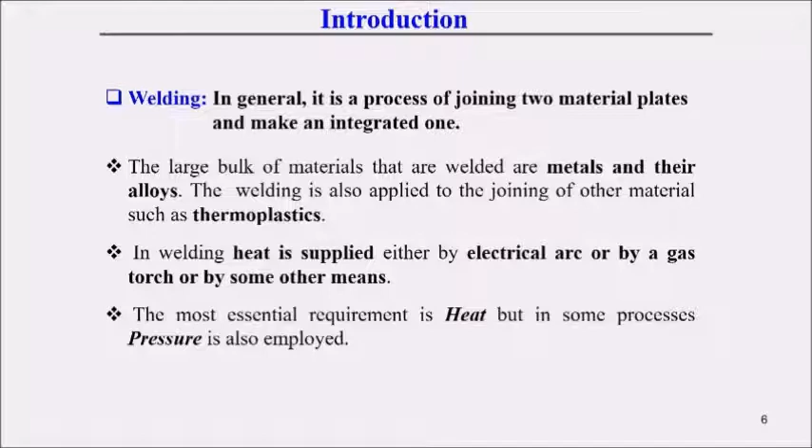can be weldable. In welding, the heat is supplied either by electric arc, by gas torch, or by other means like mechanical means or radiation energy. The most essential requirement is heat, but in some processes pressure is also employed.

We will go to practical applications of the welding process. In regular fabrication it is generally used in automobiles, cars, aircraft, refrigerators, ships, offshore structures, etc. In repair and maintenance work we find applications in joining broken parts, rebuilding worn-out components, etc.

Here I will show you a few important applications of the welding process. We have seen that welding has a lot of applications. Here we will show a few important applications in different industries. In aircraft construction, we find applications in welded engine mounts, turbine frames for jet engines, rocket motors,

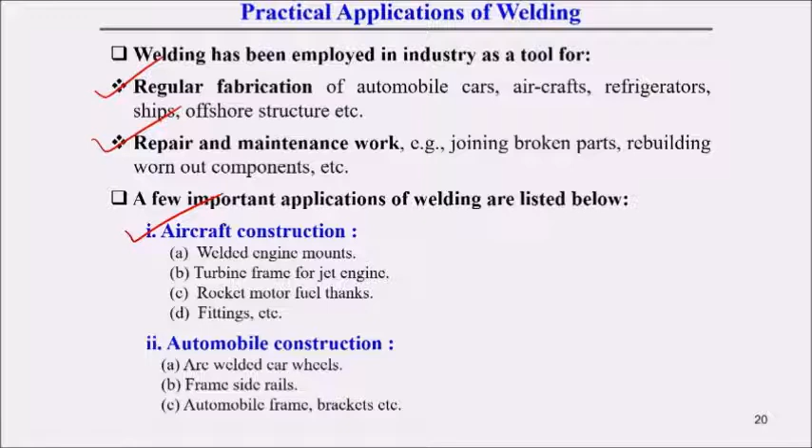fuel tanks, fittings, etc. In automobile construction we get applications like arc welded car wheels, frame side rails, automobile frames and brackets. Then we get applications in bridges, in pier construction, section lengths, etc. In buildings we also get different applications of welding like columns, base plates, trusses, and erection of structures.

In pressure vessels and tanks it has different applications like clad and lined steel plates, shell construction, and joining of nozzles to the shell. Also in storage tanks: oil, gas, and water storage tanks. In railroad equipment like rails, underframes, air receivers, engines, etc.

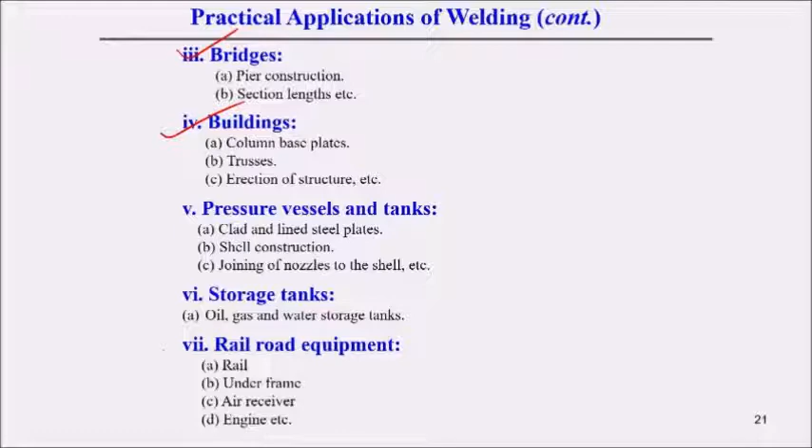Piping and pipelines like rolled plate piping, open pipe joints, oil, gas and gasoline pipelines, etc. In the shipbuilding industry like shell frames, deck and bulkhead stiffeners, girders to shell, etc. Trucks and trailers also have a lot of applications of welding. Machine tool frames, cutting tools and dies, and household and office furniture also have a lot of applications.

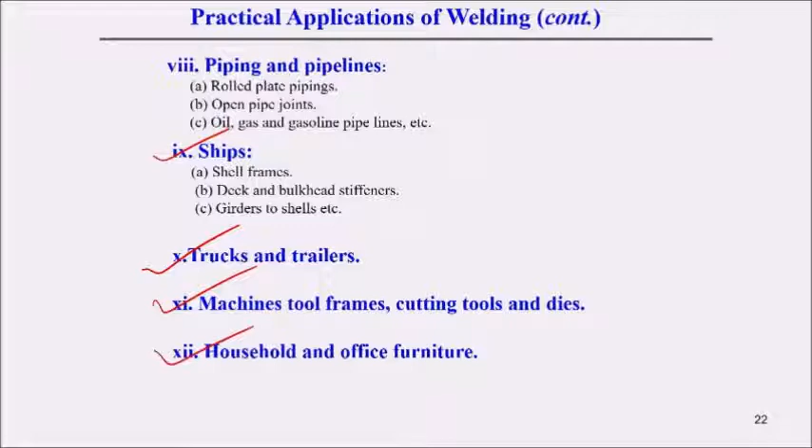In addition to industrial or fabrication applications, it is used for repair of broken and damaged components and machinery such as tools, punches, dies, gears, presses and machine tool frames. Fabrication of jigs, fixtures, clamps and other work holding devices is also done by welding.

Now here is a very important aspect of welding application, especially in hospital buildings: being noiseless compared to riveting, welding finds extensive use when making modifications, additions or extensions in hospital buildings.

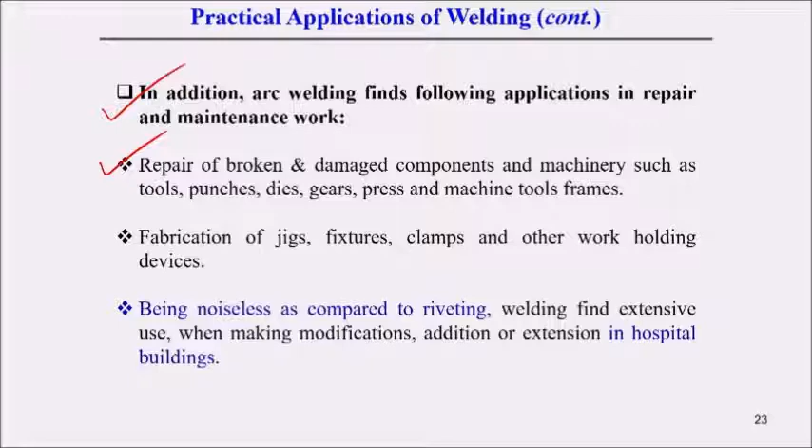Now, classification of welding processes. First I will explain the classification of joining processes, then we will go to the classification of different welding processes. Joining processes are basically classified into two types: mechanical bonding or atomic bonding. Mechanical bonding is further categorized into two categories: temporary, and permanent or semi-permanent.

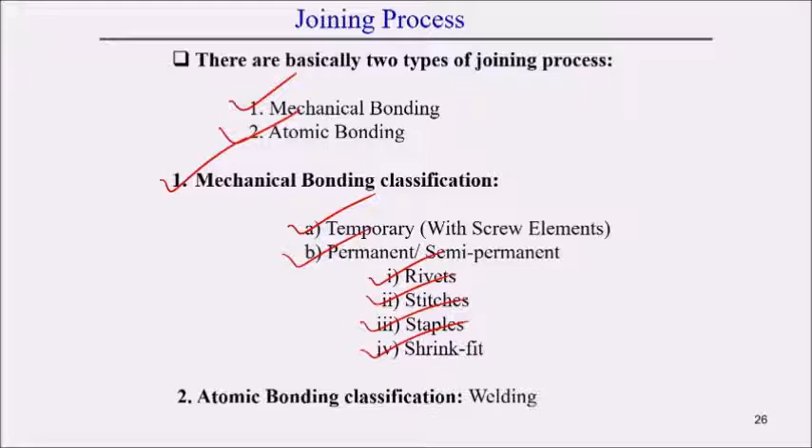In the temporary category we get screw elements, and permanent or semi-permanent joining processes can be rivets, stitches, staples, or shrink fits. In the category of atomic bonding, welding is the main category. Now, classification of welding can be done based on the following aspects.

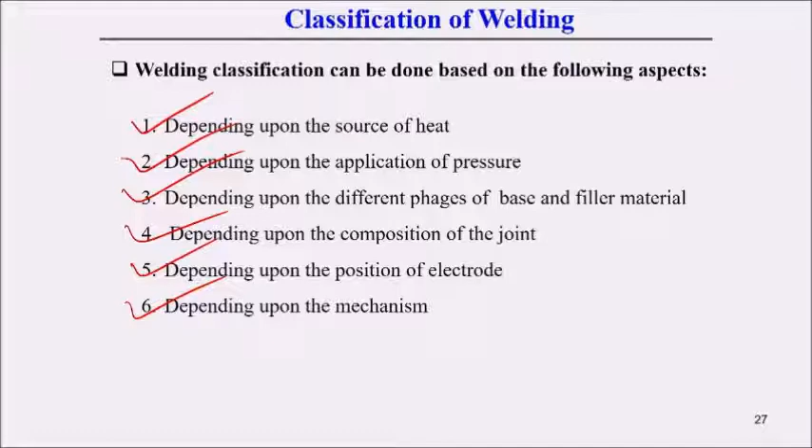Here I am showing the 6 major aspects generally followed for welding classification. Welding can be classified depending upon the source of heat, the application of pressure, the phases of base and filler material, the composition of the joint, the position of the electrode, and finally the mechanism. One by one I will describe these classifications in detail in the next slides.

First of all, depending upon the source of heat, that means which source we are using to do welding. Depending upon the source of heat, welding processes can be further categorized into another 6 different categories.

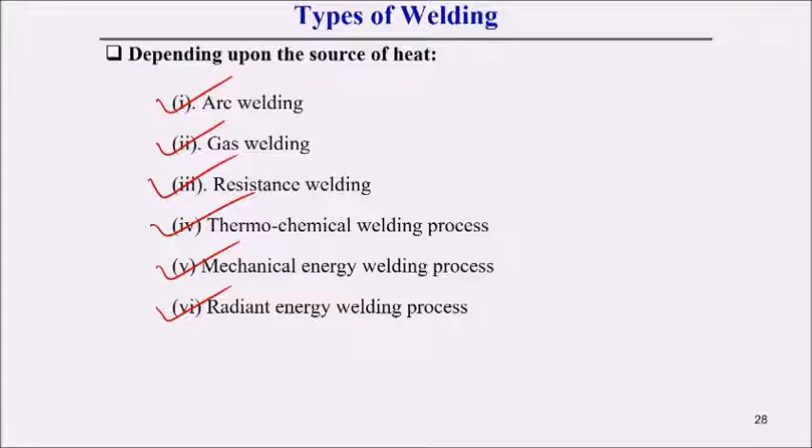That means it can be arc welding process, gas welding process, resistance welding process, thermochemical welding process, mechanical energy welding process, or radiant energy welding process. So, different welding techniques are named depending upon this. This is the most important. Here I am showing different welding techniques' names depending upon the source of heat.

In arc welding, there are around 8 to 9 different categories of welding process, that I will tell. In gas welding there are another 4 to 5 different categories of welding process. In resistance welding, where the source of heat is resistance, here also we can get around 5 to 6 different categories of welding process.

Then in thermochemical welding process, we will get around 2 to 3 different kinds of welding process. In mechanical energy welding process also we can get around 5 to 6 different categories. And finally, in radiant energy welding process also we can get 2 to 3 different types. Now, one by one I will tell in detail.

Based on source of heat from electric arc, it can be carbon arc welding. In short form it is written like CAW, that means carbon arc welding process. This short form is widely applied in industry as well as in research articles. So, seeing this short form itself, we should recognize the name of the welding process.

Like metal arc welding, its short form is generally shielded manual metal arc welding, SMAW. Then tungsten inert gas arc welding is there. Its short form is generally TIG, that is tungsten inert gas, or more popularly GTAW, that is gas tungsten arc welding process.

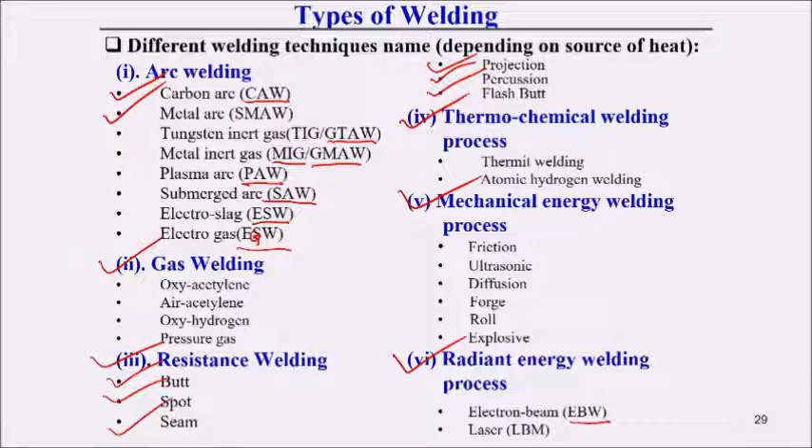Then in mechanical energy welding process, we will get friction welding, ultrasonic welding, diffusion welding, forge welding, roll welding, and explosive welding. And the last category is radiant energy welding process, where we get heat from radiant energy. That's why it is called radiant energy welding process. It can be electron beam welding, short form EBW, and it can be laser beam welding, LBW.